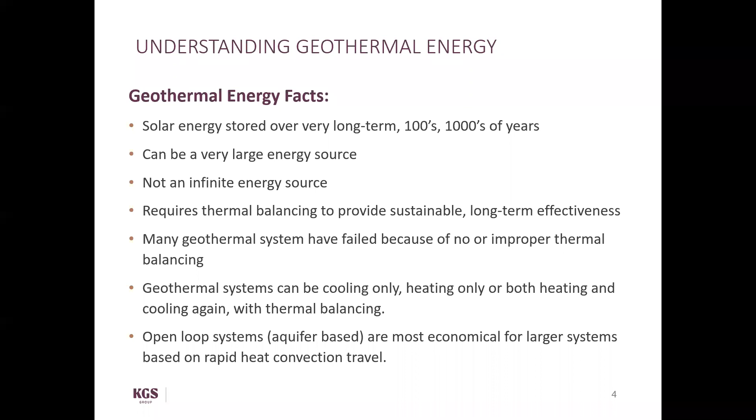Geothermal systems can be cooling only, heating only, or both heating and cooling with thermal balancing. Open loop systems, aquifer based, are the most economical for larger systems based on rapid heat convection travel. Larger closed loop systems generally have poorer economics due to the large number of ground loops and space requirements as a result of the low thermal energy transfer. Soil cover is an insulator for open loop systems and a conductor for closed loop systems.

Below about 5 meters, the ground temperature is about 6.5 degrees year round in the Winnipeg area. Out in Toronto, 9 degrees, Thunder Bay and Winnipeg, 6.5, Florida, 20. We do quite a bit of work in the north, and up in Gillam, it's 2 degrees. And if you go further north, it's ice. Geothermal systems remove this stored energy for heating, cooling, and chilling purposes.

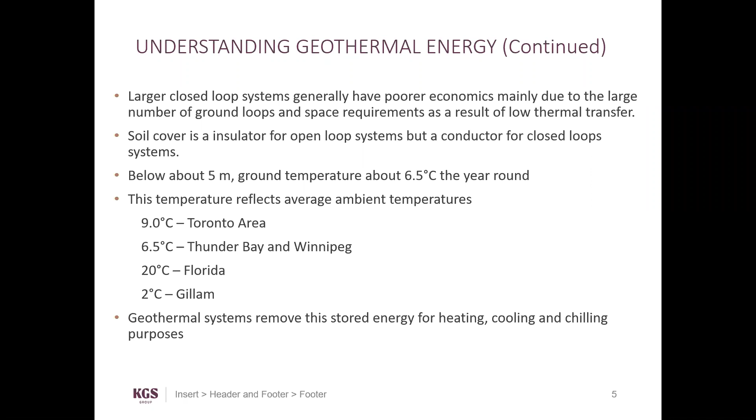So the components of a geothermal system: we've got heat pumps and chillers, basically, and with that, there's the loop configuration. We have a few standard systems, and there's an open loop, which, as I say, I've got a couple of examples in this presentation of a couple of large open loop systems. So there's pumping and recharge wells. Vertical closed loops are drilled.

Horizontal closed loop, which is probably, well, certainly when we're looking at horizontal loop, using directionally drilled boreholes is the best. This excavated, I've been trying to fix some of them. They're not really working all that well.

And we have surface water loops where they put them into the thermocline in a lake, and it's down in the 4-degree water. It works, but it's not particularly efficient.

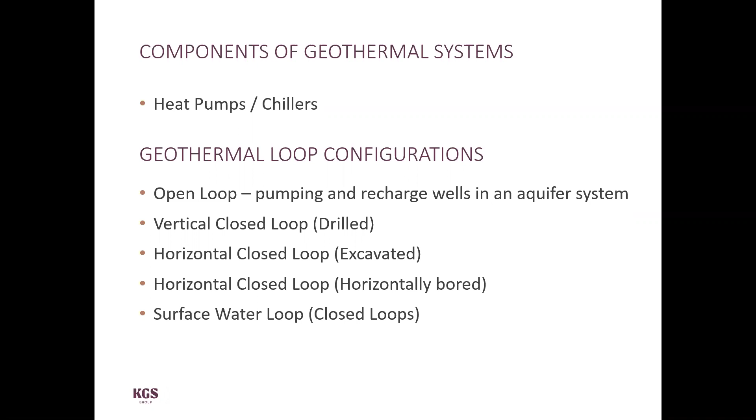So when we're looking at geothermal systems, looking at thermal balancing sources, certainly surface waters are some of the best. Rivers, lakes, ponds, swamps, solar ponds are a new one that we've been looking at. Water has such a high specific heat that it transfers a lot of energy very quickly. We also use natural warm and cold air using a fluid cooler, and sometimes we'll use a heat pump to boost it.

The closed loop systems will be using HDPE pipe, high density polyethylene, and PEX. PEX piping for if we're collecting heat below, say, asphalt or soil areas that can get fairly warm. Solar panels, solar equipment are another source. A little more money, but there are folks that are using panels.

Solar walls have come into vogue where you can blend it into the architecture, and it doesn't cost a lot of extra money. And also, there's always waste heat. Wastewater treatment plants have a lot of waste energy that can be used for a variety of different uses, heating and greenhouses, whatever.

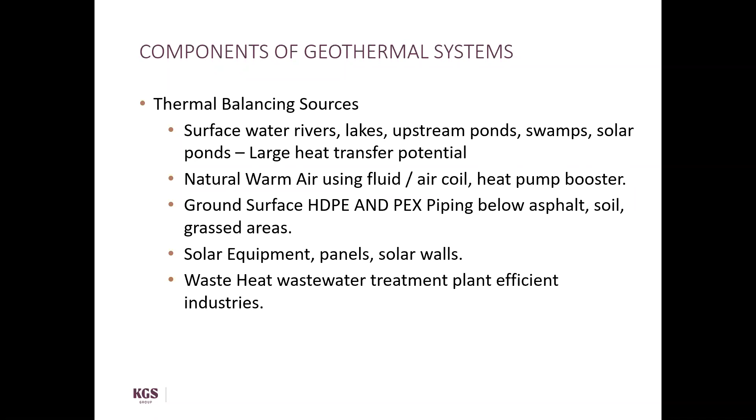Heat pumps. Okay, the heat pumps, basically what they are, they're a mechanical device that moves energy. Doesn't produce energy, just moves it from one source to another. Works on a refrigeration cycle. Your refrigerator is a heat pump. Air conditioner is a heat pump. Heat pumps can reverse to both cool and heat. Can be used to replace both boilers and chillers.

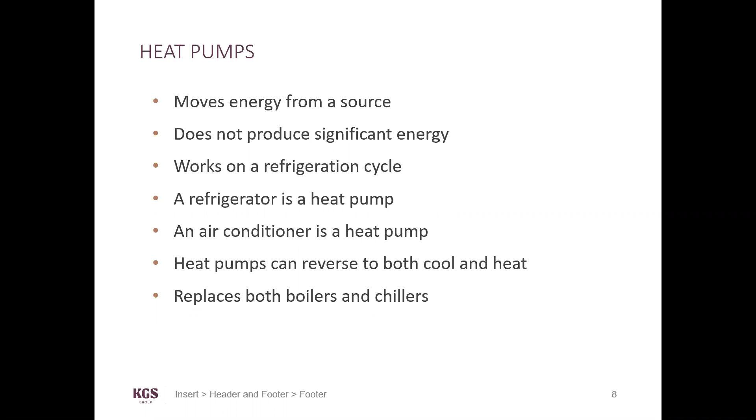Some standard heat pumps right here. The one in the middle at the top there is basically one I use for heating my pool at home. But the one on the left is one that we've used at Ikea. You'll see some of that later.

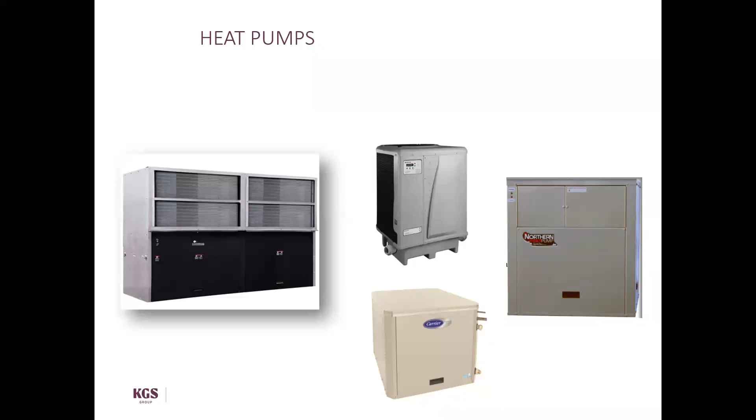Here's the size you can get of heat pumps, and this isn't even the biggest that's available. There's some bigger ones available in Europe, but this is one that's used in False Creek in Vancouver. So they're using this to take heat out of the wastewater and pump it through a whole subdivision or area of high-rise apartments.

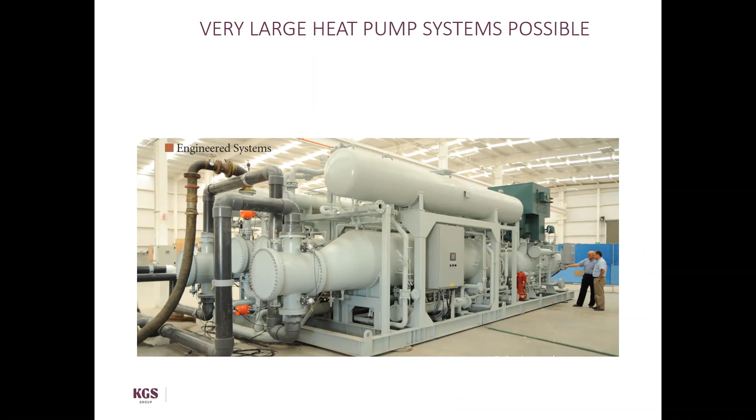So these are the different heating systems that are available. These are just schematics, but you can see there's a closed loop horizontal. The best method for that right now is using directional drilling. Some of them are just excavating these things into 8-10 foot trenches and putting in the piping, but horizontal directional drilling has pretty well made it the best for the closed loop systems.

The vertical loops are okay too, but one of the things that's a problem with them is that there's so much plumbing. Every single borehole has to be connected in and feed the system. The horizontal ones, you can do things like go under parking lots, or you can go under football fields. They're drilling in horizontal loops up to 500 feet long and even a bit longer.

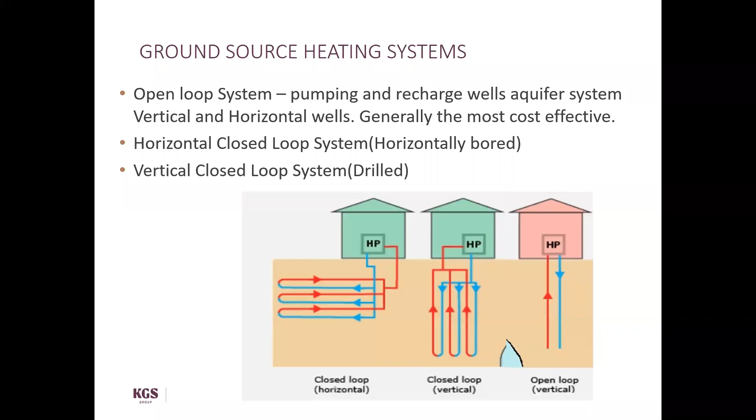So there's some of the vertical loops, 30 to 100 meters deep, based on a grid spacing of 4 to 6 meters. So with that sort of spacing, that's about the travel distance that you're looking at in the ground by conduction. So it's not great. It's traveling half of that distance from each one. So they require significant areas, especially if you're looking at the vertical loops.

There's less and less of these going in. It's more and more of the horizontal boring loops where they can have easier connections and a lot less disruption to an area.

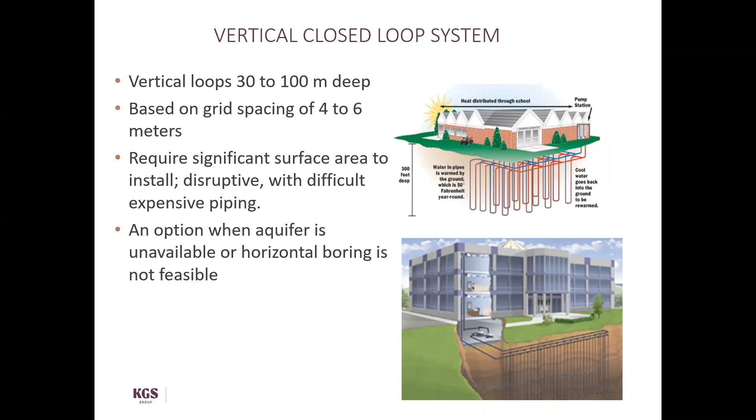So the horizontal loops, there's a variety of different ways of doing them, but in this particular one, we're showing a radial pattern where you can actually be at one location and shoot out using directional drilling, and you can do it in layers. So you can space them out about 15 feet in depth. Some of these drillers now can do up to 60 feet deep, so you can get in a fairly compact area a pretty good volume of dirt that you can use for collecting heat, and also adding heat.

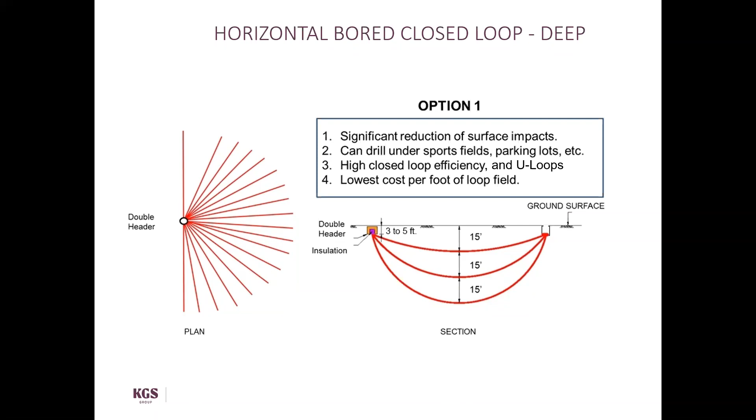This is one type of loop where you use a header system, and you can again drill down at 15, 30, 45 feet and end up with a fairly compact system, but a lot of area, or a lot of volume of earth to connect your system to.

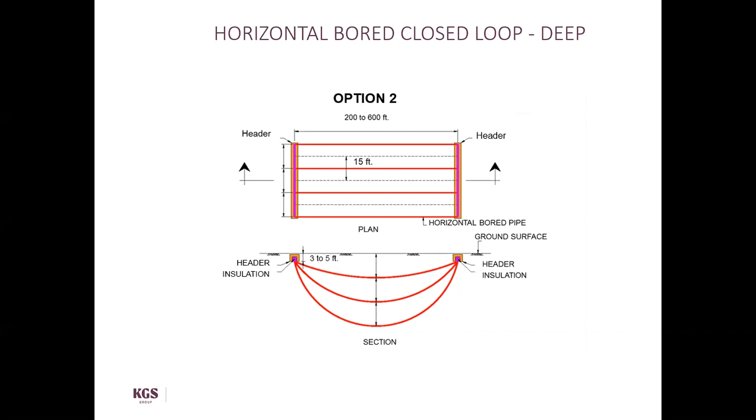There's a surface water system as well. I've never put one in. I've had people ask me about it, but they are functional, but they are a problem, or the efficiency is not the greatest, because you're usually looking at the thermocline in the winter at 4 degrees C or lower. So it does work, but it's down the list of priority.

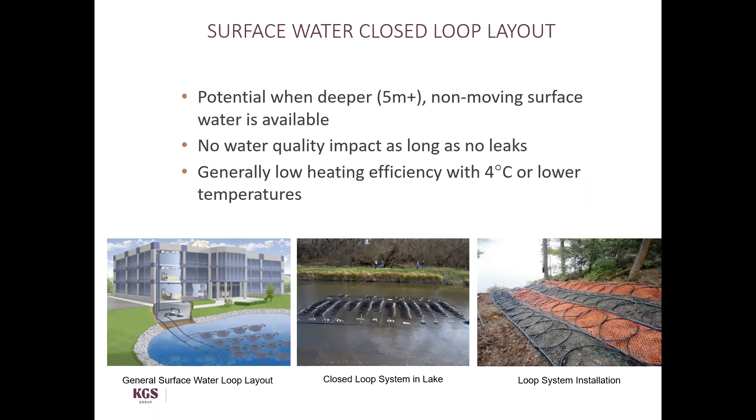This is one from Winnipeg, but this is just to show you some of the temperatures you're looking at, and out your way, you're even getting warmer. But if we're looking at this one here, I think the Red River in Winnipeg, you can see we're getting up into that near 25 C in the middle of summer. So there's a range in there if you're looking at anything along a river where you can get it fairly economically. There's a lot of available heat in a river.

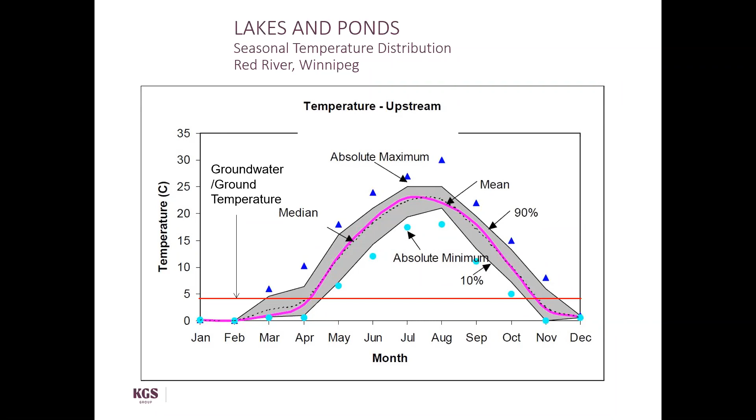This is a pond we have out in Winnipeg as well. So we're looking here at getting temperatures well above 20 in the summertime. And this is a few acre pond. In fact, this was an old quarry pit, and these are the temperatures that they're collecting out of that.

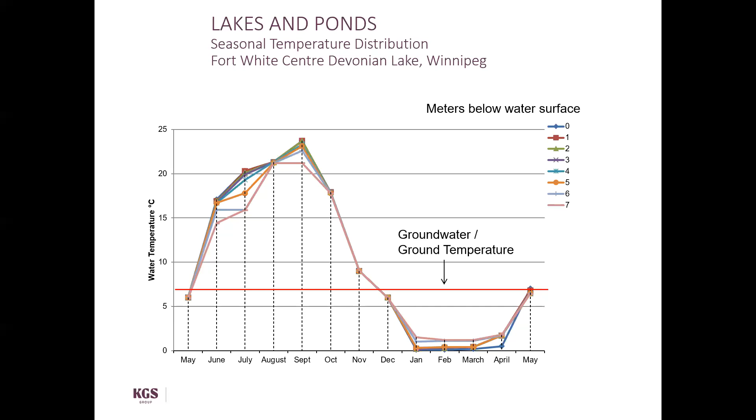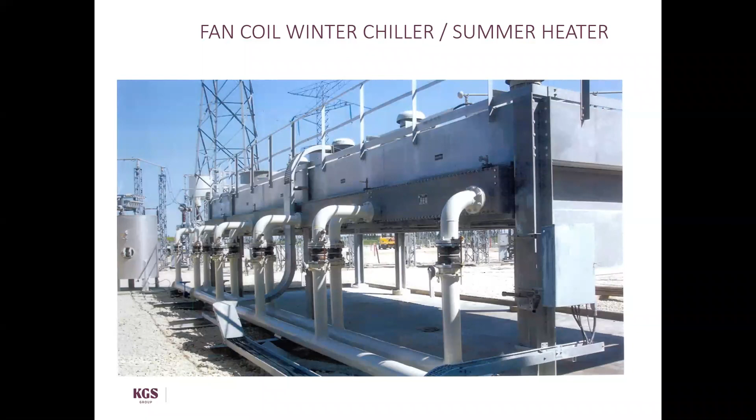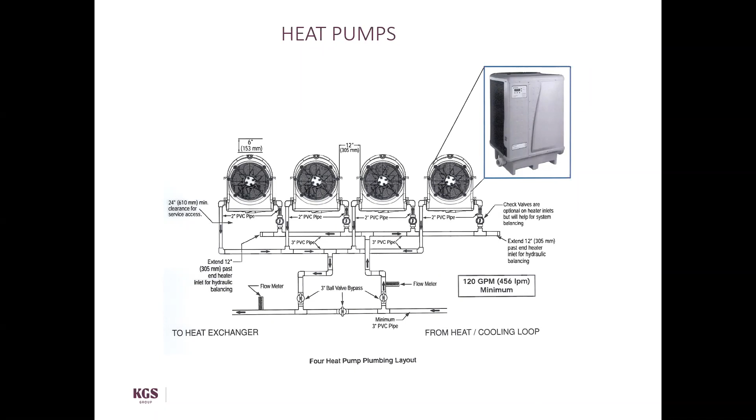You can also use something like this, and this particular one is a heat pump. They're small. This is actually a pool heat pump, and you can put them in. They're about $5,000 each, and over the summer, these things can put a whole pile of heat into the ground, and you can put it in with some of your off-peak power too. You can put this stuff in the ground and have it for the winter heating. I haven't put one of these in, but it's certainly an option.

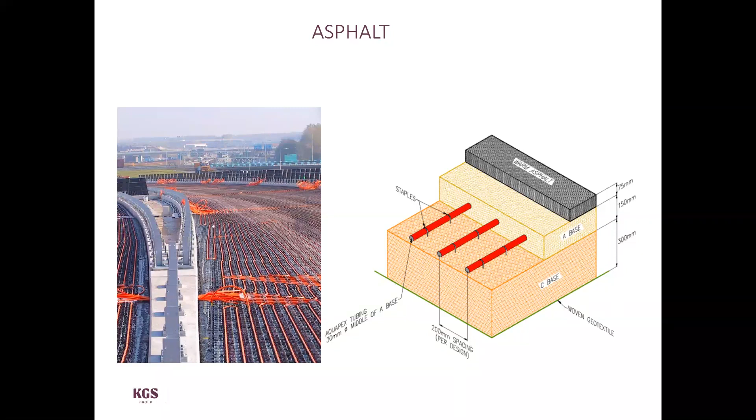This is what the Europeans are doing in a few areas. They're actually putting in this PEX piping underneath. In this particular case, they're taking it out of a major highway system and putting it into apartment blocks along the route. And it certainly would work, certainly down your way and here, putting this into a parking lot, etc. We haven't done anything with the roadways, and actually I have never really done one with a parking lot, but this is an option that the Europeans have been using for a while.

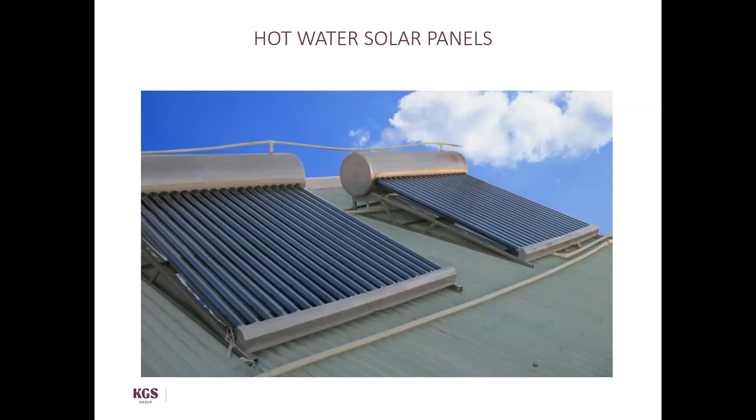These are sort of your hot water solar panels. These are some pictures that I took when I was in China a few years ago. They have them all over the place in China. I wasn't going to put this one in, but I decided to do it. These are fairly inexpensive solar panels. I have them for my pool. I have both the heat pump and these things to heat it, and they're pretty efficient. And they're down to about $5 a square foot for panels, which is fairly inexpensive.

This is something not really new, but it's called a solar pond. Really what it does is it can collect solar energy, but by putting in the salt zone in the bottom, it doesn't turn over like a normal pond where the water comes to the surface and evaporates to keep cool. This one doesn't turn over, so you end up with waters that get up into the 70 to 90 degree range. There's been one tested in Alberta, I think, but it hasn't really caught on. But I think it has some pretty good potential. It's fairly inexpensive, and we definitely have a lot of waste salt out here, certainly in Saskatchewan with all the potash mines.

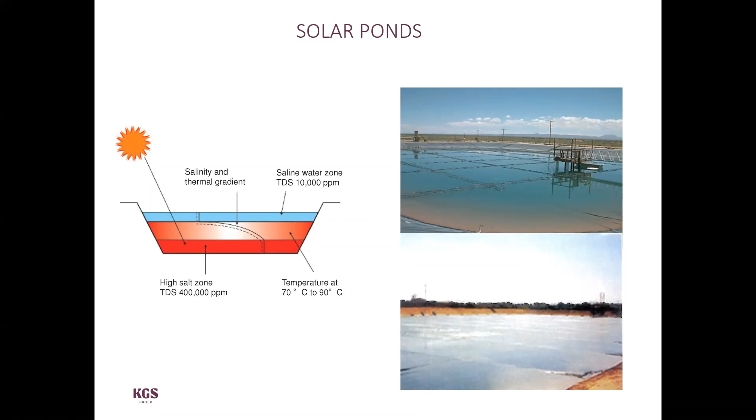A couple of systems now I'll just go through with you. The open loop system that we put in for Ikea, and one for Manitoba Hydro at their Dorsey converter station. What the converter station does is, in Manitoba, most of our power systems, our dams, are all up north. So we convert to DC to come south, and then AC to distribute. The Dorsey converter station is the converter that takes it from DC to AC, and it produces a

lot of heat. So they've been using massive amounts of chilling power and chillers to work all summer long, and they've got a fairly busy crew to look after it, and their maintenance costs are fairly high. So they were pretty happy with being able to eliminate their chillers totally. The Cross Lake closed loop system, Cross Lake First Nations.

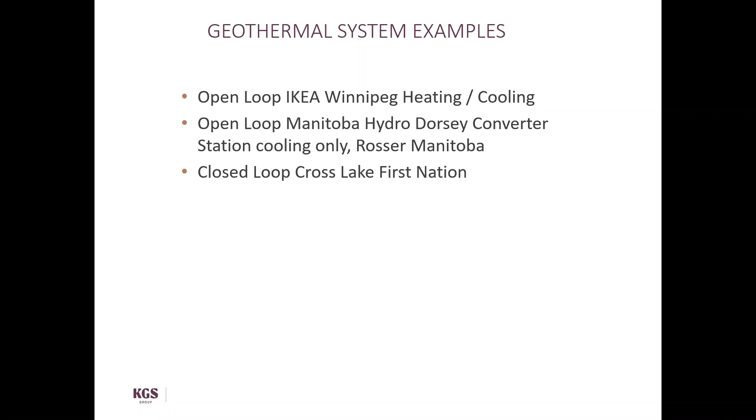This was one where there was a spill from a fuel tank system, and we were hired to dig it out and put a soil farm together for it. And we talked to ISC, Indigenous Services Canada, about potentially putting a geothermal system in the bottom of the hole and heating their building. And ultimately they said, okay, let's go for it. So we've put sort of a design together for them.

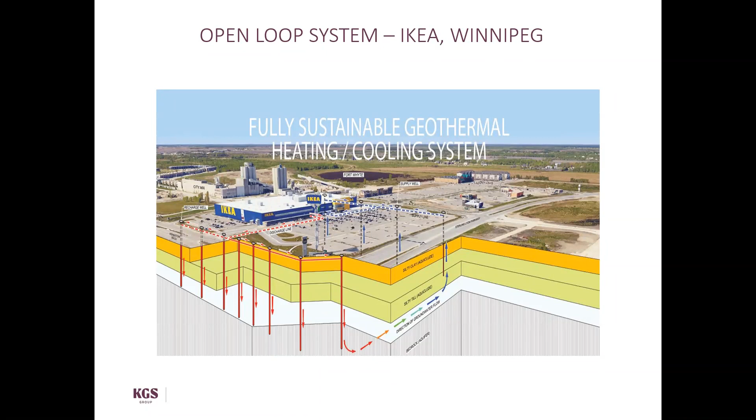Now this is the geothermal system for Ikea. The building's 400,000 square feet. We're pumping somewhere in the order of about 2,000 gallons a minute year round. And we have a set of pumping wells and recharge wells. The building itself is thermally balanced. With the way Ikea runs their business, they have lighting that never turns off. So you've always got that lighting going in. Even in the winter, you're getting heat.

They have a fairly large staff. They have a large kitchen as well. They're always selling their Swedish meatballs. So they've got a pretty big kitchen, and there's a lot of customers there. And the heat pumps themselves put a little bit of heat in the building. But ultimately, when you do the balance on it, this thing didn't need any extra heat through the winter. In fact, we've done some modeling on it, and we're seeing the temperatures actually go up a wee bit in this one. It started off at about 6.5, and it's nearly 8 degrees C now.

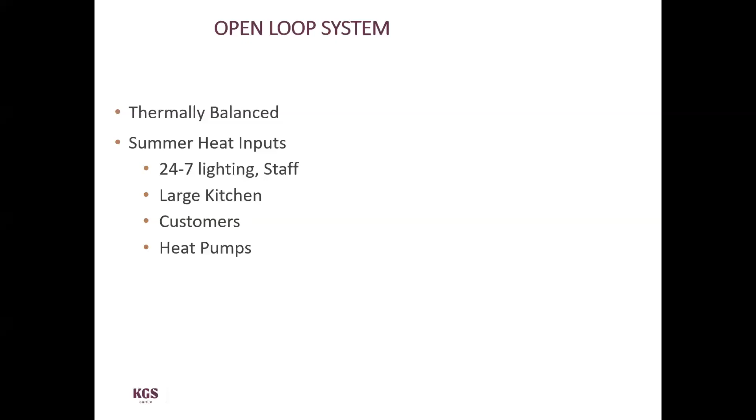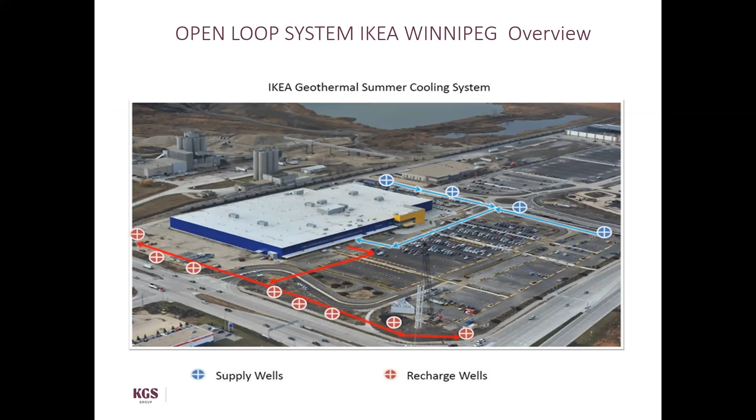Ikea brought their team in from BC to design geothermal for this facility and decided on putting 350 boreholes below the parking lot. And the contractor that was hired to build this contacted me, and I suggested that when you connect up 350 boreholes under a parking lot in Winnipeg, most of the heat's going to go to keeping the parking lot warm and not much in the building. So we switched over to an open loop system, and now we've got 60 feet of clay for insulation instead of 4, and we're able to heat and cool with very little difficulty. They haven't really had much problem with it.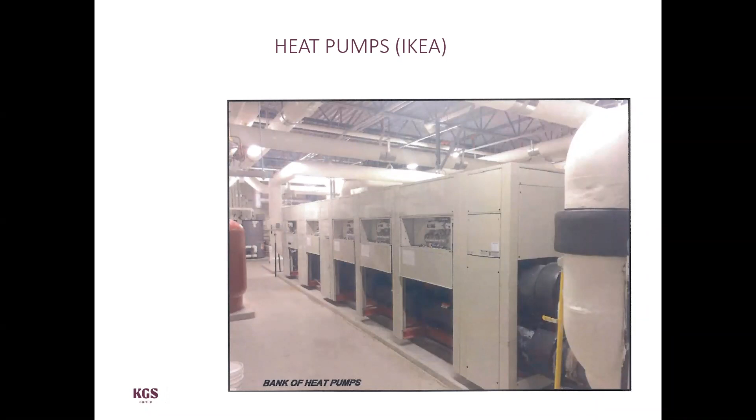Here's another one we've done. We completed it for Manitoba Hydro. It's a similar system to Dorsey where you're recycling. This particular one though was strictly for cooling. They have a great excess of heat because of this AC/DC conversion.

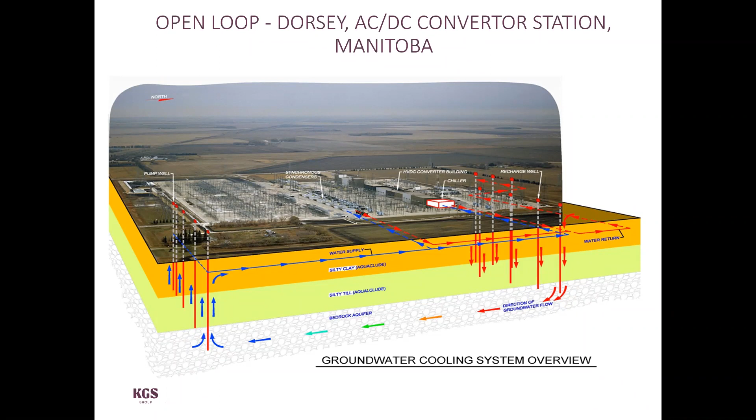So in the summer, what we do is we take the water from the ground in that area and pump it through coolers inside the building, and it's about 7 degrees, and we pump that water out into the recharge wells a few hundred meters back from this. And then in the winter, we go through, I better punch a few here. Yeah, so you can see there's the winter chiller on the right.

These are some of the drillers that were putting the wells together for me here. So we have a peak flow of 3,000 gallons a minute. There's 5 supply wells, 10 recharge wells. We did win an award for this particular one. It's a fair number of years ago already, I think 16 or so years ago.

The Dorsey system adds cold into the aquifer in the winter to balance all the heating. So in the summer, when we bring up 6 or 7 degree water, we actually pump it back in the ground at about 10. And in the winter, we add cold to balance off the 10. So we're putting 2 to 4 degree C water back in the ground, just using the lots of cold air we've got in Winnipeg in the winter to make air conditioning.

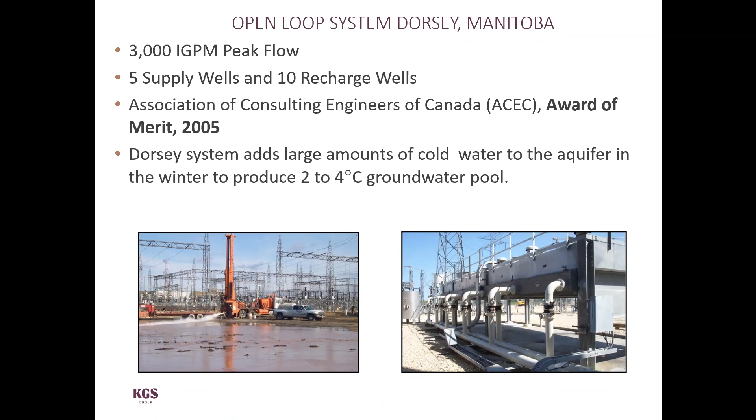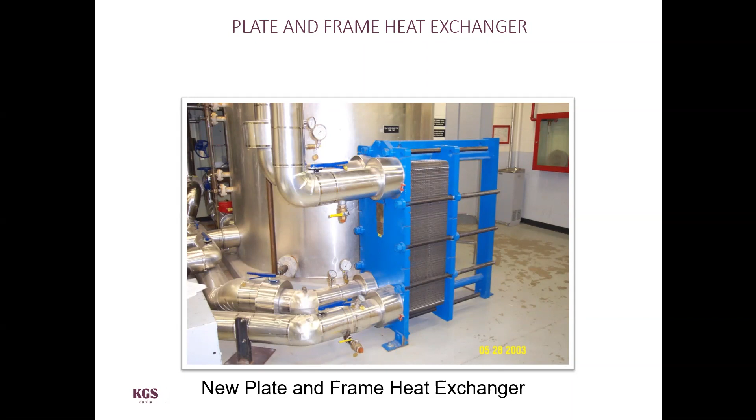This is the plate and frame heat exchanger. Pretty small. It's surprising how much water can go through these things. But anyway, we're not pumping 3,000 gallons a minute very often. It's mostly down in half that range, 1,500 to 2,000. So what this one does is it allows you to take the heat and move it from one side to the other. You take the cold on one side of the plate and it chills down the warmer stuff on the other side of the plate.

These are the chillers that were in place. I think there were 8 of them, and they're 100-ton each. These things produced a lot of heat, a lot of noise, were fairly expensive to run, and had a pretty high maintenance contract. With hydro, they had to have these running 24/7 in the summertime. So they had at least 2 to 3 people working on maintenance for them, a few $100,000 a year just in salary for these guys to look after this. Plus Trane had a maintenance contract.

They weren't real happy with me when I got rid of this system for them. They don't speak to me much anymore, but anyway.

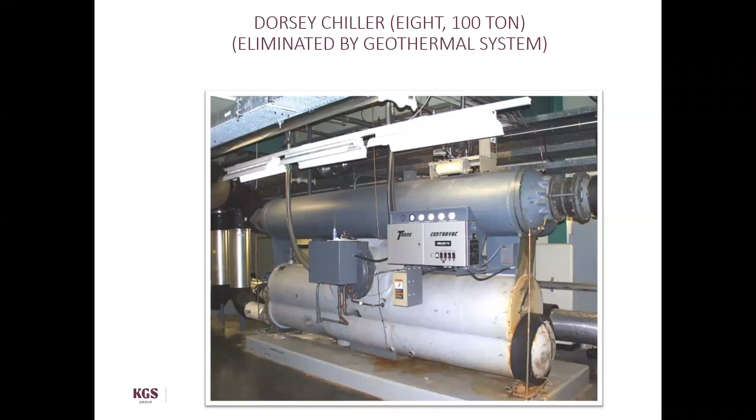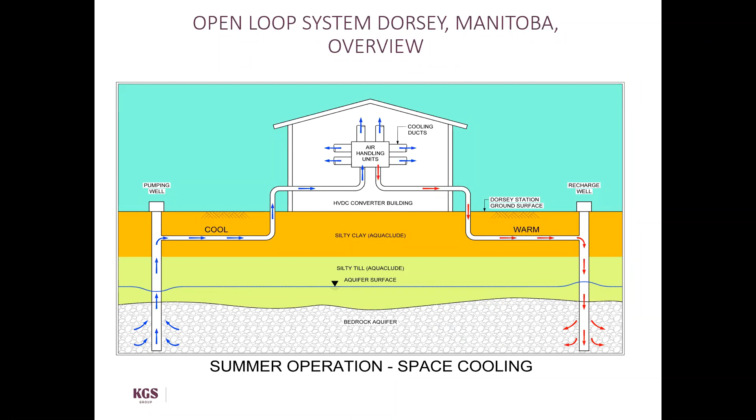This is the system. So you're pumping cold or cool water up through the air handling units to cool the place down, and then the warm goes into the ground. Then we reverse it in the winter, same direction, but now we just take this winter chiller and use the plate heat exchanger to put cold back in the ground to balance the heat that we put in during the summertime.

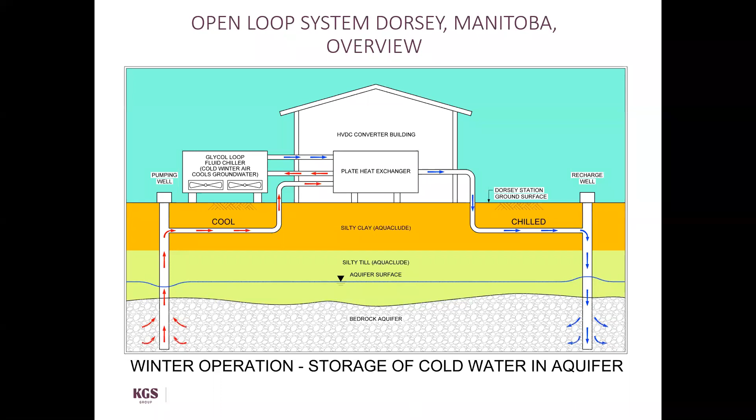After that, you basically have to cover this with a good bed of sand and keep it saturated. All these systems in the ground have to be wet to be efficient. If you end up with dry soil around the pipes, they're nothing more than an insulator. You don't get much heat transfer at all.

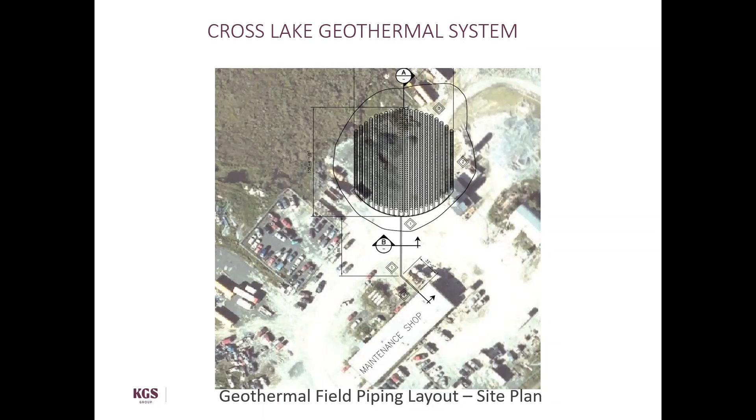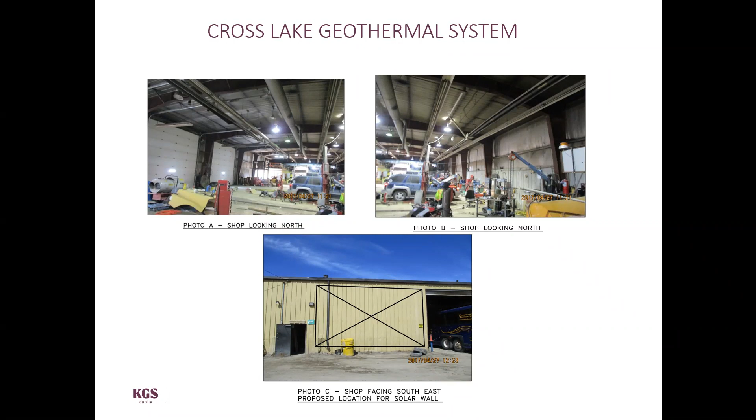Another thing we want them to do here: when the field is finished, we're going to end up with some granular on top, and we're going to tar it so that we can add heat in the summer, using that hot black surface heat going into the ground as a thermal balancing system. Then in the winter we're going to have them blow snow all over the top of it to give some insulation and keep that 40 below air from getting down into your system.

You make your cold side in the winter and your warm side in the summer, and you take out the cold side in the summer and the warm side in the winter. So this would be similar to what we've done at Dorsey, to get rid of the chillers completely. It's strictly a groundwater cooling system.

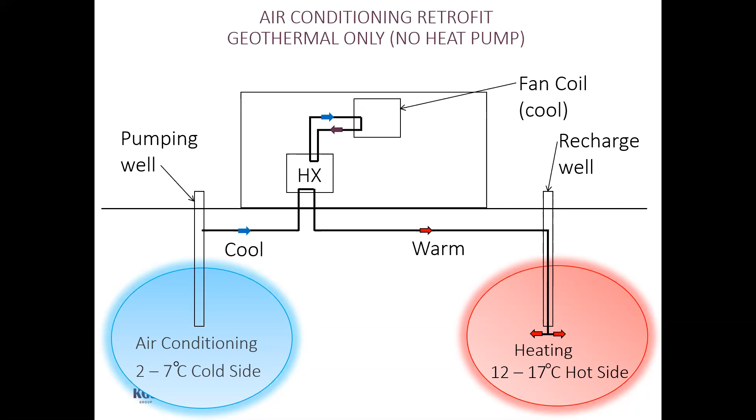And I think most of you know that chillers are one of the big expenses. It's a lot more work and a lot more expensive to maintain than a boiler. But a heat pump system does both heating and cooling. So you can see this system, depending on the one you want to do, if it's the cooling side. But if you're looking at adding cold in the summer or in the winter, you can do more than just building cooling. You could use it for hockey rinks or refrigeration plants, anything like that. If you can get 2 to 7 degree water out in the summer when it's 35 out, that saves a lot of money on your compressor system and wear and tear as well.

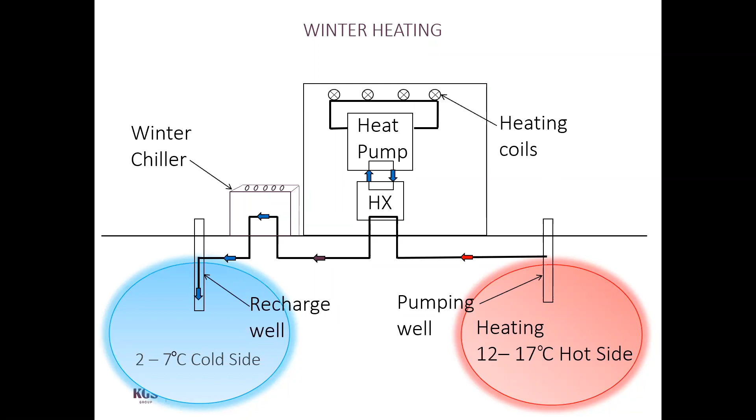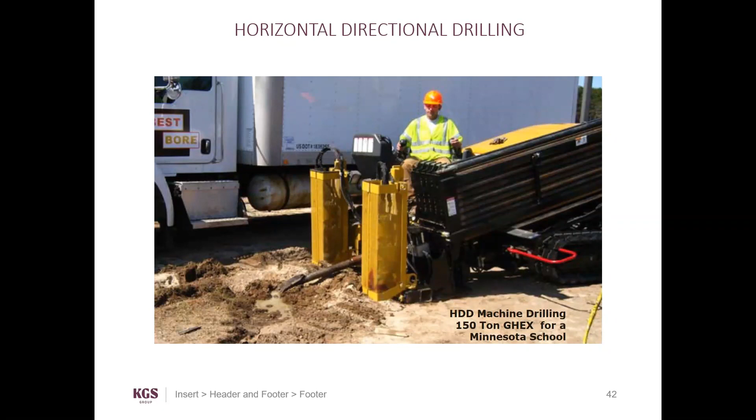This is a horizontal boring unit. So this is one where there's their little bit in the front. It's a duckbill type. Anyway, these guys can really horizontally drill, and the efficiency and ability to move the pipe and measure where it is is surprising. They can drill 500 feet and come up within a few feet of where you want them. So when they're doing their drilling, I think I got one next here to show this a bit.

So this is how we put in a horizontal well system. So we drill down and we move to the far side and drill underground. We connect on then to, typically, a piece of poly pipe. Let's say we can put an 8-inch poly and pull it through. And then we slide into that hole a 6-inch PVC screen. And then we pull out the poly, and now we've got a well screen in the aquifer that we can put pumps in both ends.

We could put in submersibles in both ends. We could put in an end suction centrifugal in either end, but you end up with a well that, you know, it could be a fairly poor aquifer, but if you can get 500-600 feet of open screen in that aquifer, it changes a lot. You could be getting a 25 gallons a minute well and bump it up to, you know, the 500 gallons a minute kind of thing.

I put a couple of these in. I put them into sand in Terrace Bay, Ontario. What they were doing is putting in a sewer line. And so we put the horizontal well under it to dewater it for them. And they just left it in place. If they have any problems later, they can pump it and bring the water levels down.

And also these drillers are pretty slick now too. They can go down 60 feet. They can go through a bedrock aquifer now. They can go into some poor limestone, for example, and drill a hole and leave you with a well that, instead of doing 20 gallons a minute, can do a couple of 100 gallons a minute.

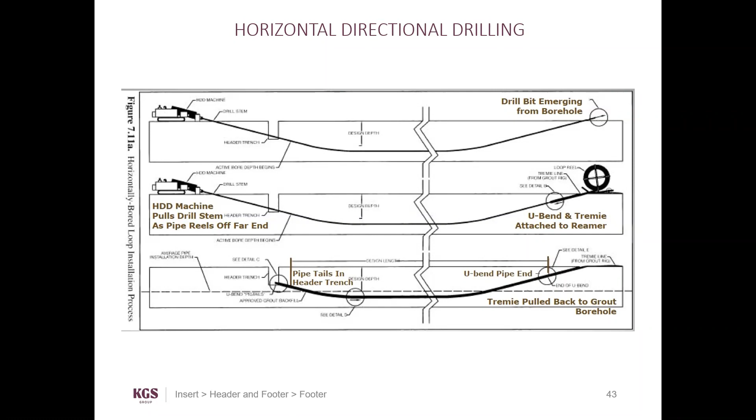So this is when you see the bit emerges from the end. They put on one of them Chinese finger locks and pull the poly back down through the hole. In this particular case, they show you this U-bend. The U-bend is that in one hole, the water goes back and forth in the same hole so that you can have all your connections quite close to the building. So you've got, in this particular case, it looks like two 2-inch lines. They're welded together and have a U-tube at the end. But these things can come back to one location so that ultimately your plumbing is pretty simple to sort out.

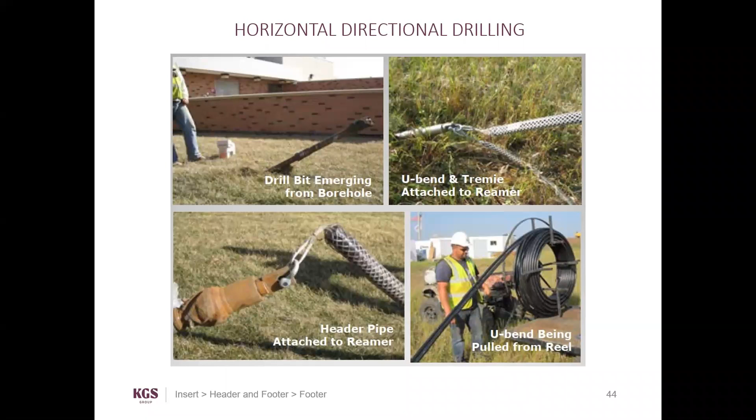You can do some modeling too. We have models for the open loop system called FEFlow, and for closed loops we use COMSOL. But it gives us an opportunity to work out and do some estimates of how much piping we need, etc. And also at that point, an economic overview is part of what the owner would do, take a look at what their costs are for heating and cooling, and the operational costs of chillers and boilers, and determine what's going.

Gas is pretty cheap right now, so in some cases it's difficult to bump it out of the place. But if they start charging for greenhouse gas emissions, that might change things around. So then we go to test drilling and pump testing, just to have a look at what your conditions are on your site, to make sure that we understand whether we have to go vertical wells, horizontal wells, or horizontal closed loop. And with that data, we may do a little more modeling, and then we look at final system design and construction.

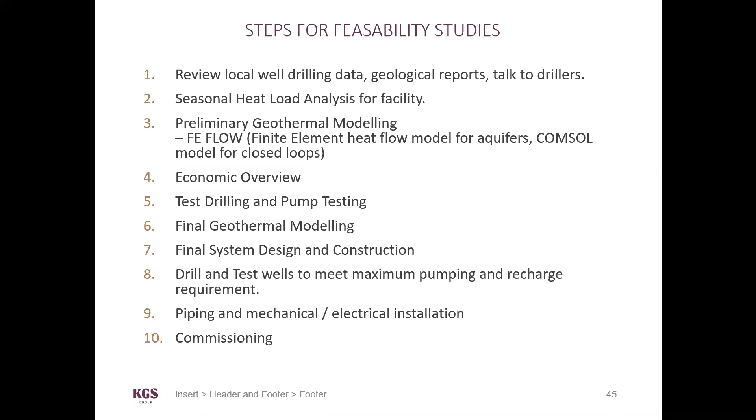I've got too many slides as it is. I think I've got to get cracking.

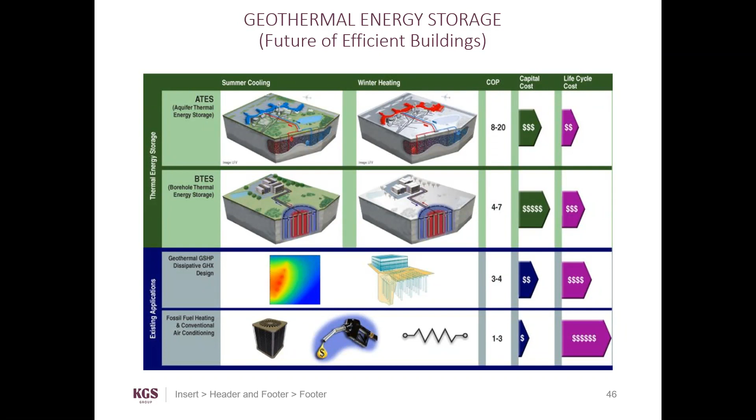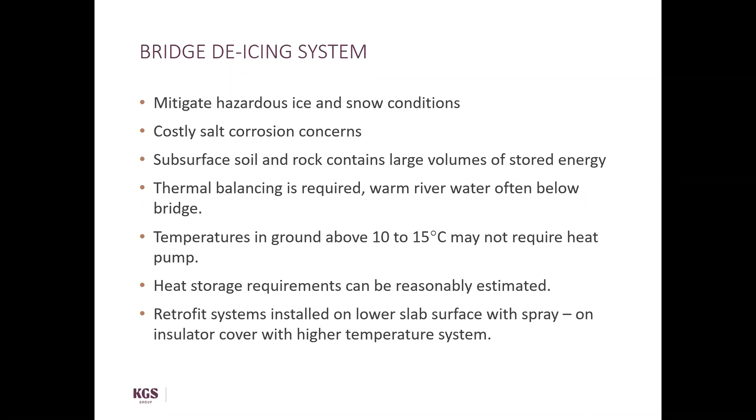Most of our bridges are built, so there are some retrofit options where you put the piping under the bottom of the slab and then put spray-on insulation to keep the temperature and push it through the bottom of the slab. Not quite as efficient, but if you've got an aquifer or something underneath, it might be worth looking at, adding to the lifespan of the bridge.

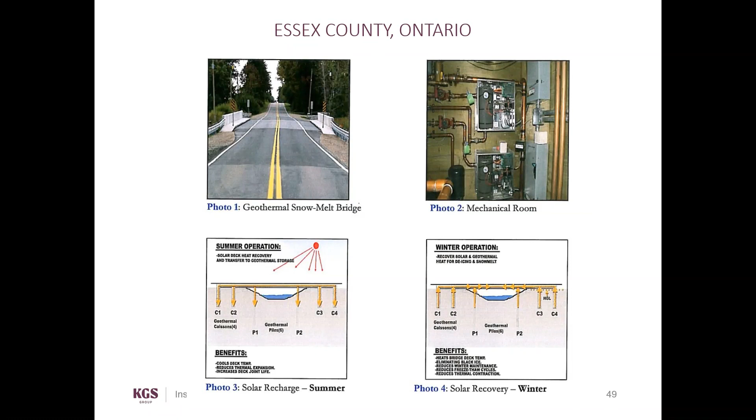And we're finding now that there's a fairly large demand. We have a number of projects that we're looking at with the federal government for First Nations to develop greenhouses that can produce food in the north. There's a serious problem with different types of food insecurity, and certainly there's a pile of things.

We're actually looking at one with Manitoba Hydro where we're looking at some waste heat at one of these converter stations, and trying to build a couple of greenhouses that can use the waste heat. The one I was looking at had like 1,000 gallons a minute of 100-degree Fahrenheit water that goes out to that winter chiller that you saw there and just dumps the heat into the air. So we're looking at trying to take that energy and grow food up in the north. So the geothermal has a variety of different applications.